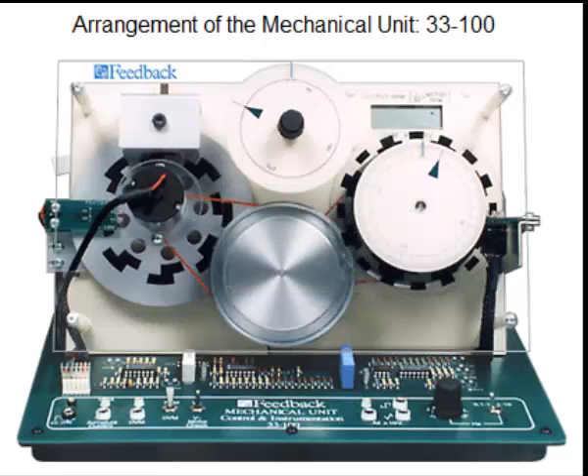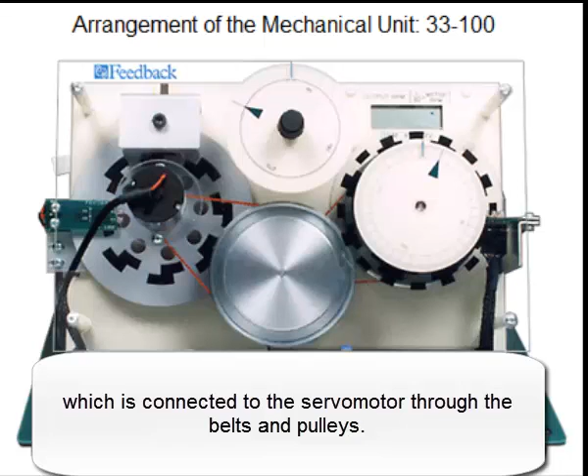This video is about servomotor position control. Exactly what that means will be discussed first. This is the mechanical unit. That's the servomotor axis. The goal is position control of this axis, the output shaft, which is connected to the servomotor through belts and pulleys.

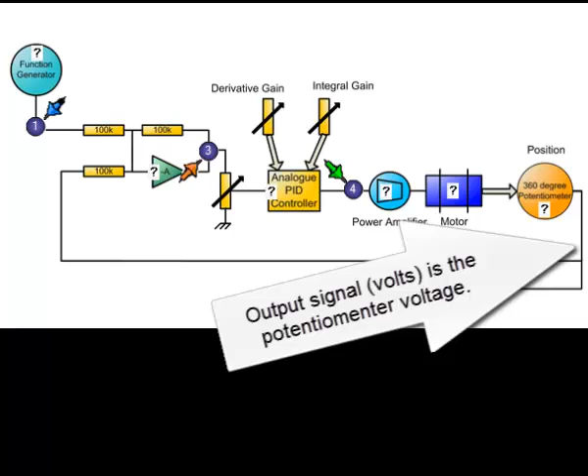This block diagram shows the most significant components. That's the servomotor. That's the potentiometer that measures the position of the output shaft. The output signal in volts is the potentiometer voltage. The desired position in volts is a triangle or square wave reference signal. The error signal is the difference between these two.

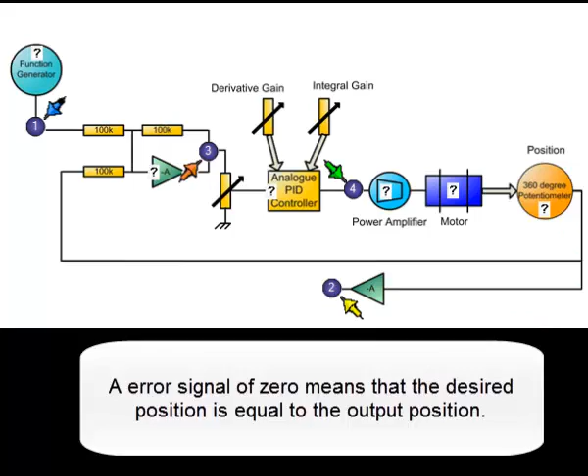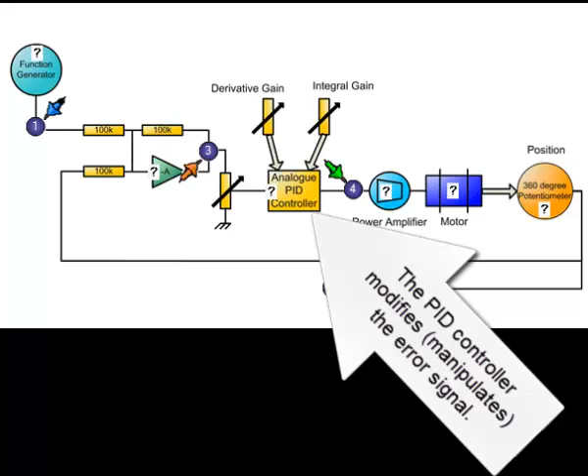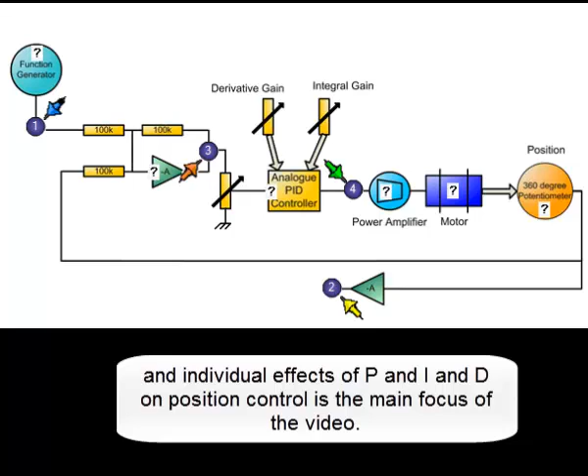An error signal of 0 means that the desired position is equal to the output position. In other words, the output position will be following or tracking the input signal when the error signal is 0. The PID controller modifies or manipulates the error signal. And the individual effects of P and I and D on position control are the main focus of the video.

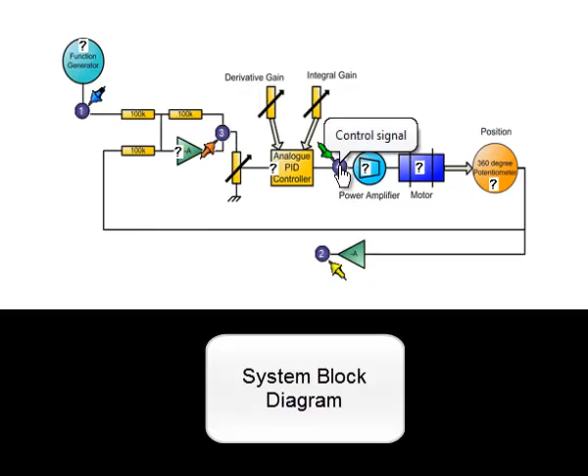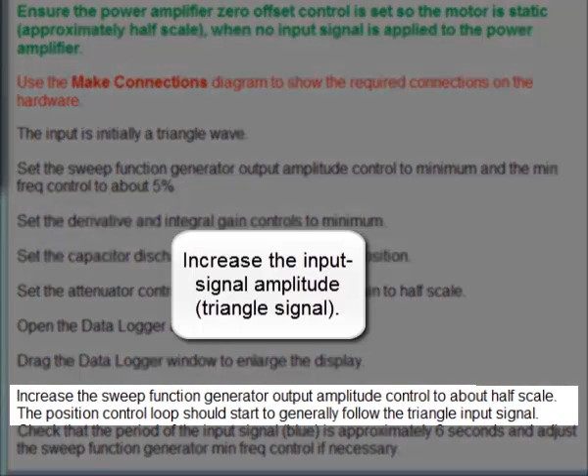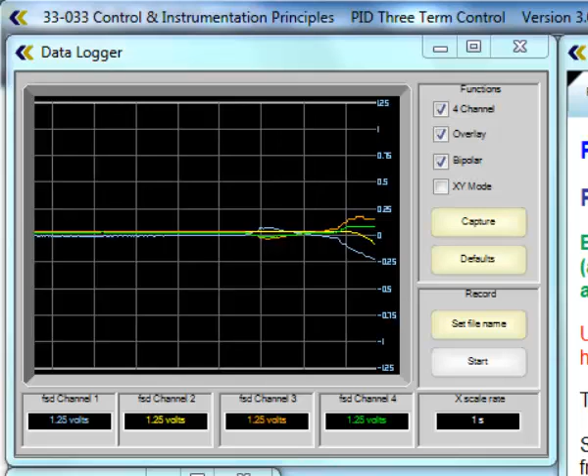Initial setup instructions. All signals are 0 because the output amplitude is minimum. Increase the input signal amplitude, which is a triangle signal, but with only proportional control initially. As the proportional control is gradually increased, all three signals show up. The input signal is blue, the response signal is yellow. Ideally, the yellow signal would track the blue signal.

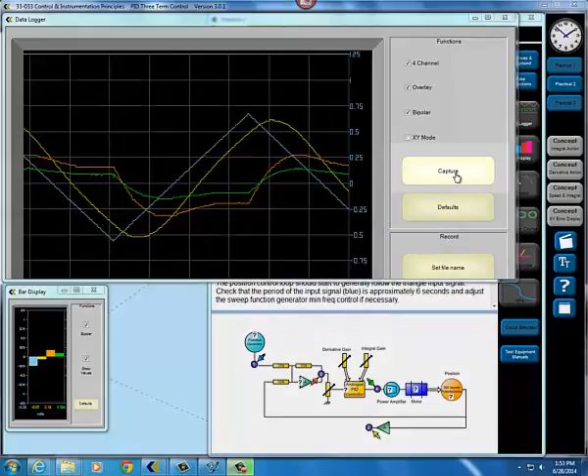Set the input signal period to about 6 seconds. Click on the capture button. Click on the main cursor button and click the first cursor. Click on the delta cursor to click the second cursor position, which will then read the period of 6.33 seconds.

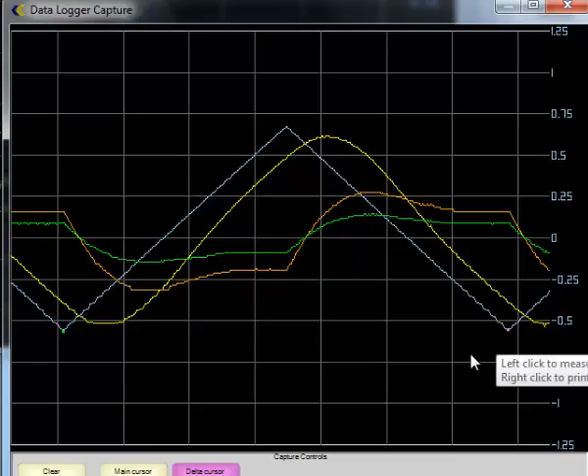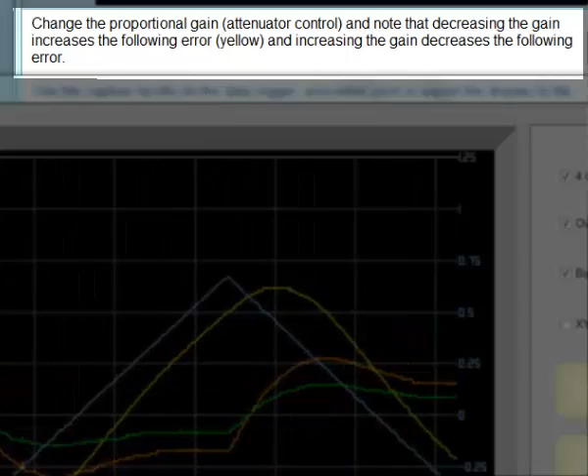Change the proportional gain and note that decreasing the gain increases the following error and increasing the gain decreases the following error. Currently, the proportional gain is 50%. Now the proportional gain is 25%. Now the proportional gain is returned to 50%. And now the proportional gain is set to 100%. The proportional gain is returned to 50%.

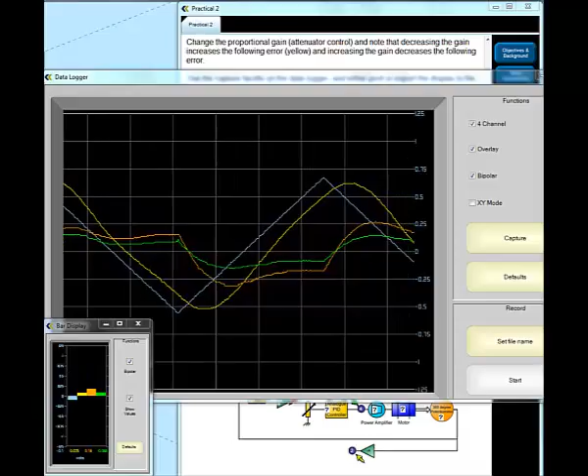Did you notice that increasing the proportional gain caused the tracking error to decrease, and that decreasing the proportional gain caused the tracking error to increase? That's when the proportional gain was 50%. That's the tracking error. When the proportional gain is 25%, the tracking error is larger. When the proportional gain was 100%, the tracking error was smaller.

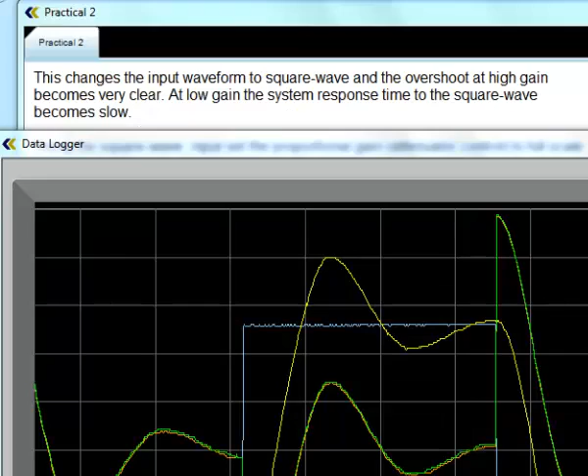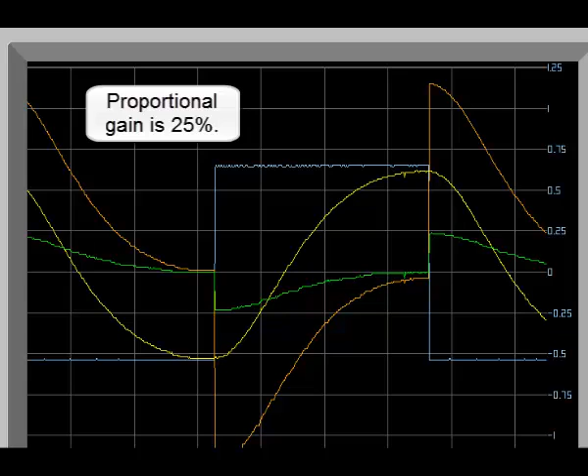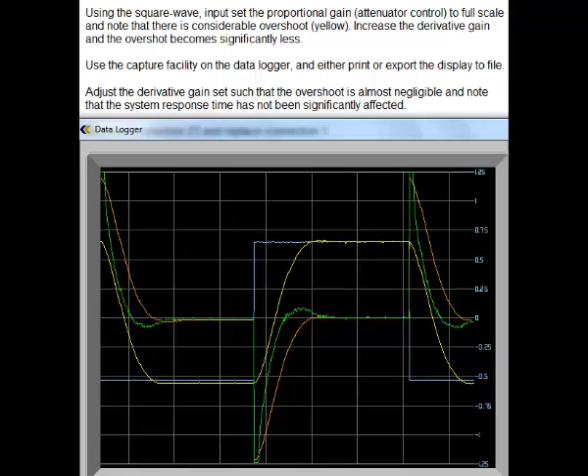Replace the triangle wave with a square wave input. The proportional gain is 100%, which produces a large overshoot. When the proportional gain is 25%, there's no overshoot, but the response is sluggish. Proportional gain is 100%, and the derivative gain is turned on now to 65%. The overshoot is almost zero.

Return to the triangle input, the proportional gain is 100% and the derivative gain is 65%. Note the following or tracking error. Turn the integrator on now. With a gain of about 25%, note the following or tracking error goes to zero. But 25% integrator gain increases overshoot.

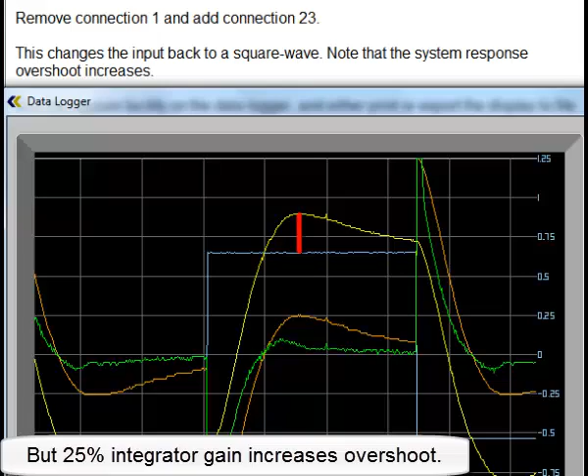In summary, proportional gain decreased the steady state tracking error, but increased the overshoot. Adding derivative gain decreased the overshoot, but did not decrease the tracking error. Adding integral gain decreased the tracking error, but increased the overshoot. Unfortunately, these three gains, proportional, integral, and derivative, create effects that are not independent.